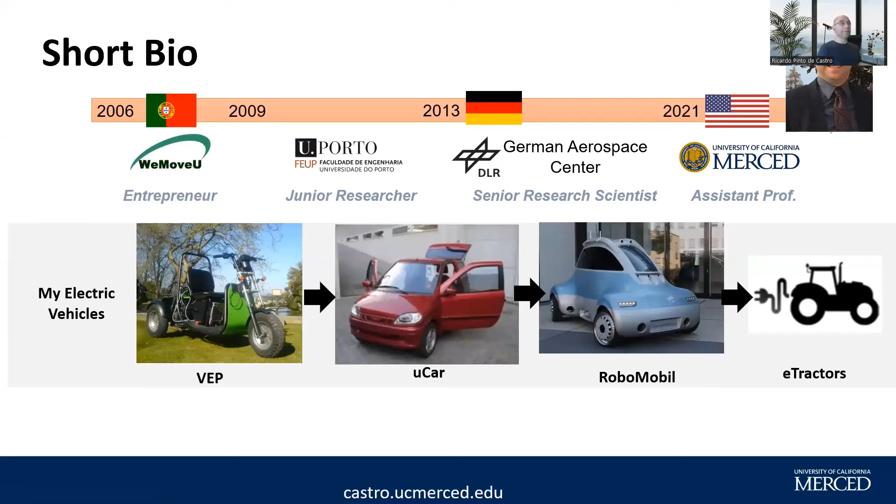When I arrived, I realized that the campus is surrounded by farms. We are in a very rural area. Most of the vehicles that I see in the farms nowadays still run with internal combustion engines. And so there is a huge opportunity and necessity to decarbonize this sector. And the next stage of my career, I would like to dedicate to finding practical ways to bring electric powertrains to the farm.

A bit of background regarding EVs on roads. Very likely, some of you already drive an EV. There are not just passenger cars, but also other types of vehicles becoming electric. Light-duty trucks. You might come to campus using an electric bus, and so there is a lot of traction going on with the electrification of road vehicles. Also, in terms of sales of road vehicles, this year more than 13% of all sales are going to be of EVs. And the forecast for the next years is of tremendous growth.

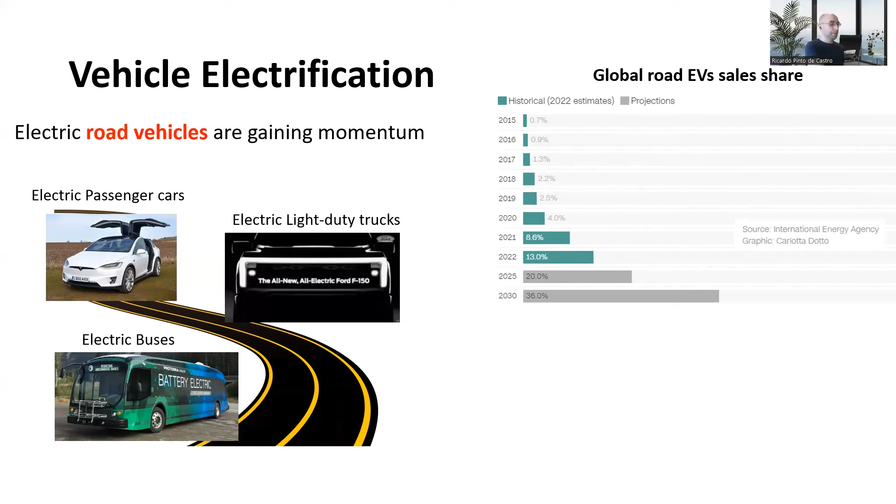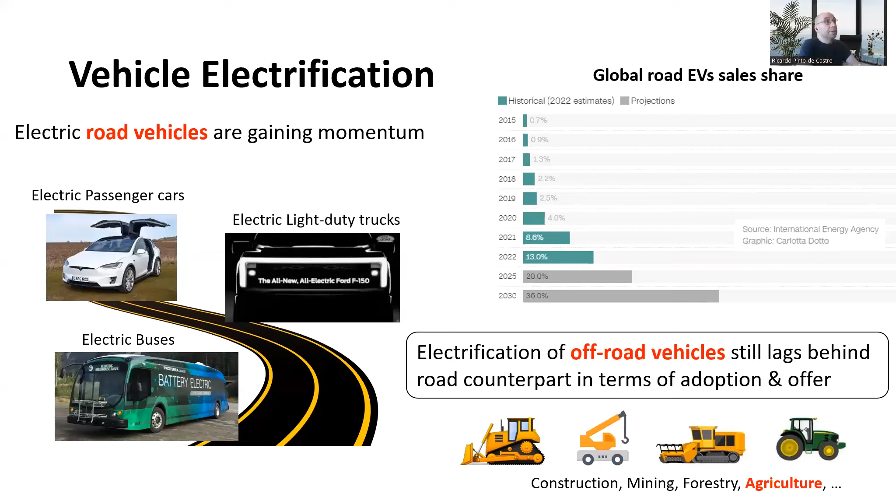But there are other types of vehicles that we need to use, and they don't operate on roads. They operate off-road. Some of the examples you can find in construction sites, in mining, forestry, agriculture, which is the focus of today's presentation. And in comparison with road vehicles, you don't find many off-road EVs. Also, in terms of adoption, we are still lagging way behind what is happening on the road. And so that's the main motivation for today's talk, to look more into this sector, and in particular into the electrification of farm vehicles.

So my presentation is going to be divided into three main parts. At first, I'm going to talk about why it's a good idea to electrify tractors, some of the challenges, some of the opportunities, and I'm also going to present one of the main research questions that I've been looking at in the last months, which is: I want to understand under what conditions an electric tractor can be more affordable than a diesel, especially when you take into account the entire lifetime of the tractor. So not just the purchase price, but also operation and maintenance costs.

And in the second part of the talk, I'm going to say a few words about the methods that we are using to address this question, some of the operational requirements that we need to understand for the tractor, some of the simulation models that we are using to predict the performance of the tractor. And then at the end, I'm going to share some of the techno-economic results, some discussion, and outlook for future work.

So tractors are used in farms, and almost 50% of all the land that we have here in the US is dedicated to agriculture. So it's a big sector. And tractors are used in farms to provide power to a wide range of agricultural tasks and operations. Usually you attach an implement to the rear of the tractor, and depending on the implement, you can be supporting different types of tasks, ranging from tillage, weeding, fertilizer application, harvesting, and also shuttling of crops from one side to the other.

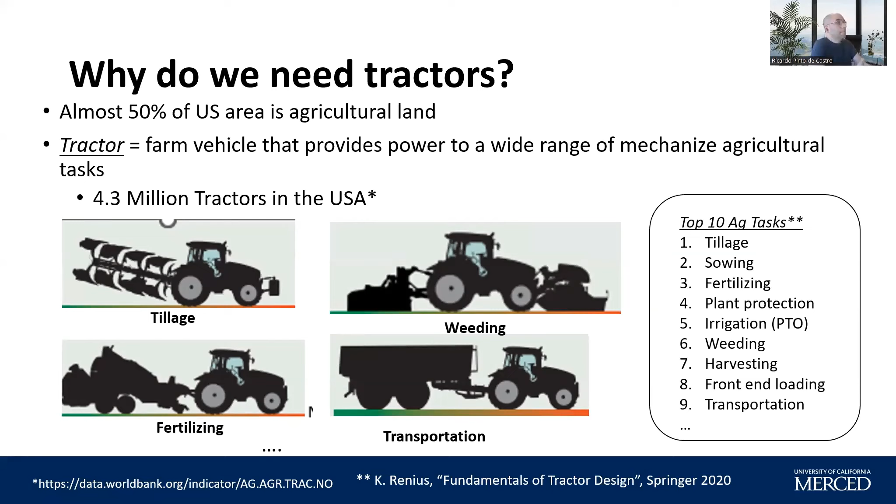And there are plenty of tractors here in the US. More than 4 million tractors exist here in the US, and most of them still run on diesel. And so they generate emissions, they have all kinds of issues, as we will see in the next slides. And so it is a necessity for us to start thinking about electrifying these kinds of vehicles.

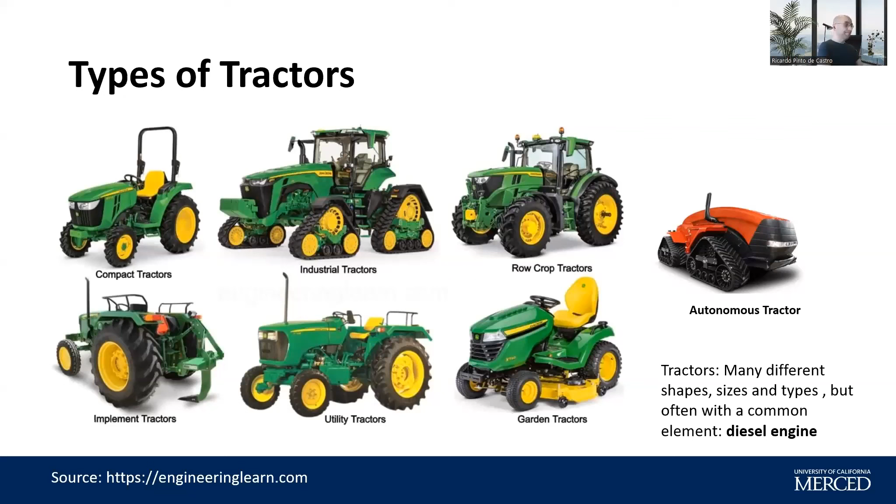Tractors come in different shapes, different forms. You can find them in gardens. You can also acquire compact or utility tractors, which are a bit smaller and are usually very effective, for instance, for orchards. You can also go a bit bigger for row crops, and also industrial tractors for big industrial farms. You have different types of locomotion, wheels, tracks. Lately, you also have autonomous tractors being developed. And so there is a wide variety of options, but most of them still share a common feature, which is a diesel engine.

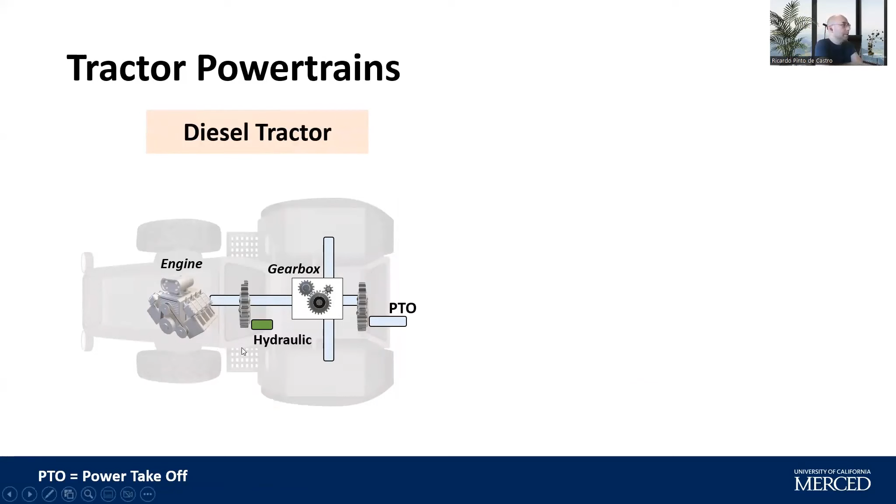And in this slide, you can see a simplified representation of the powertrain of a conventional tractor with a diesel engine. Coupled with the engine, you have the mechanical transmission, a gearbox that provides power to the wheels. You also have an additional interface to transfer power and energy to the implement through the PTO, the power takeoff. And you very likely also have a hydraulic system inside the powertrain. And what I would like to discuss today with you is: why not replace the diesel engine in the tractor with an electric motor and supply energy to the tractor using, for instance, a battery instead of burning fuel.

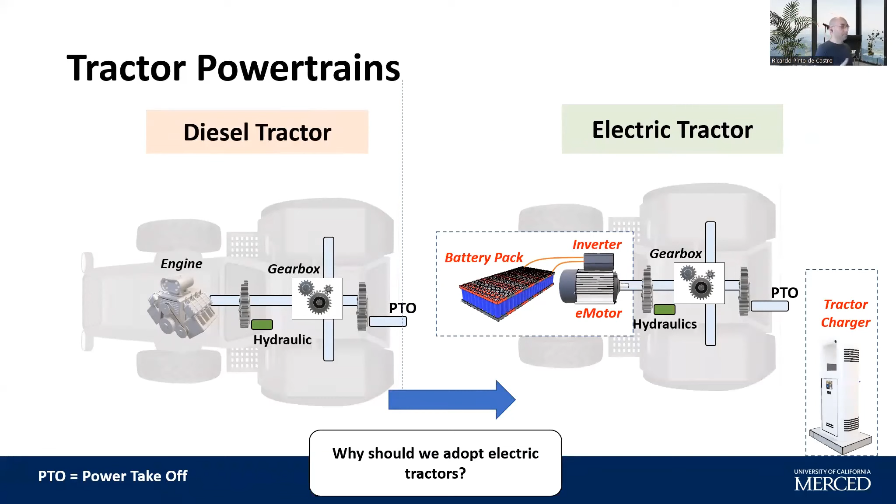And it's not just acquiring the tractor, you also need to think about how you're going to charge. We're also going to look into the charging problem. And so now I'd like to address the question, why should we electrify the tractor?

One reason is related with air pollution. Diesel and internal combustion engines generate CO2 gases that affect global warming. They generate particulate matter, nitrogen oxide, NOx. In particular, this last gas is something that can cause respiratory illnesses among humans, and it's a big concern.

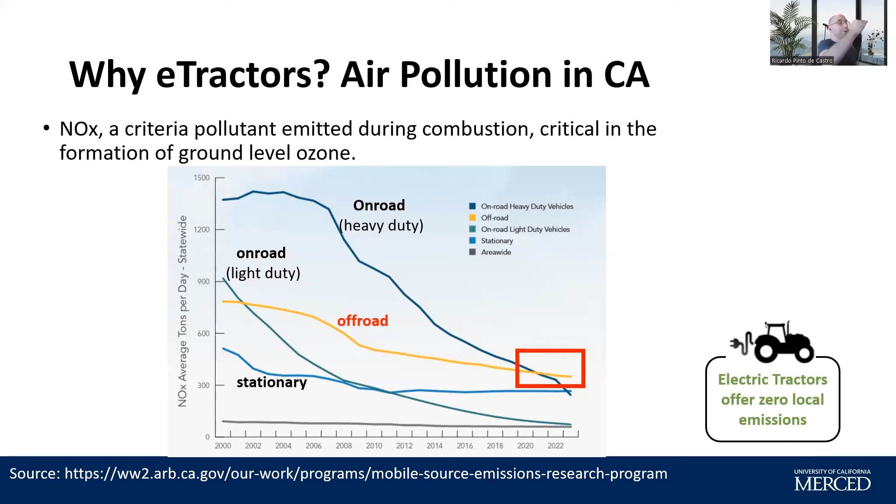And the positive trend that you see here in this plot is that these emissions are going down. But if you look closely into this plot, you can see that the pace at which the reduction of off-road emissions is happening is a bit slower than the reduction in other sectors. In fact, off-road vehicles are on track to overtake road vehicles as the main source of NOx, which is going to be a big problem. And so electric tractors can help us bring these emissions down.

Then another dimension is related with policy and regulations. Perhaps you heard a few weeks ago, California announced the ban on the sale of cars with internal combustion engines by 2035. There is also an executive order from our governor that expresses the desire to transition to 100% zero emission off-road vehicles also by 2035.

But there is a catch here, which is for off-road, this is not yet mandatory. It's only where feasible, because it's a bit more challenging to electrify these vehicles. In any case, electric tractors are and will be compliant with some of these upcoming regulations that we start to see here in California.

Energy efficiency. Diesel tractors are not very efficient. In fact, most of the energy that you put into the engine is lost into heat, and a modern diesel tractor does not offer peak energy efficiencies higher than 40%. So most of the energy you put there is lost.

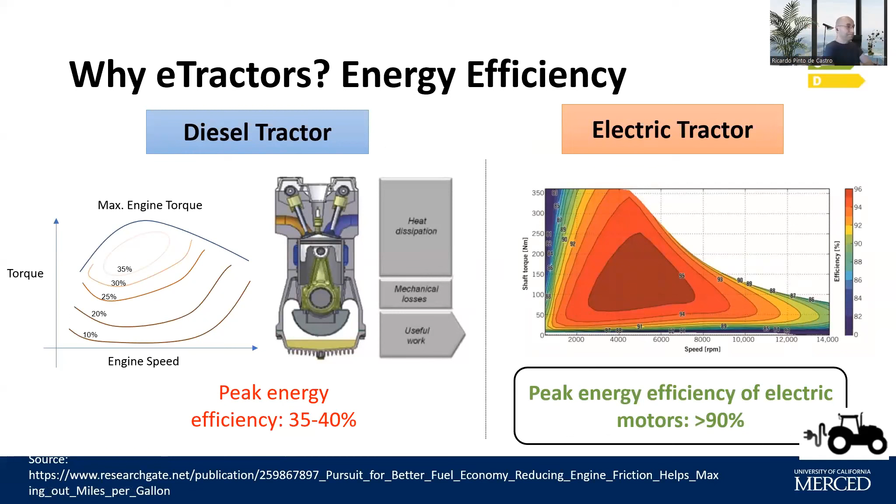This contrasts with the high energy efficiency that you can obtain from an electric motor and an electric tractor. Modern electric motors can offer peak energy efficiency higher than 90%. So it's completely the opposite. Most of the energy you put in the motor is used to develop useful work. And that's a big advantage of electric tractors.

Additionally, we should also look into the noise. And to understand that, it's convenient to look into this noise scale using decibels, dBs. We start at 0 dBs, which is the softest sound that we can hear, and this goes all the way to 120 dBs, which is something that you might be exposed to if you go to a rock concert. And a diesel tractor generates noise in the range of 95 to 105 dBs, which is pretty significant.

And according to the CDC, if you are exposed to noises that are higher than 100 dBs for less than 5 minutes, you might develop risk of hearing loss. And so you can imagine farmers, workers that are in the farm, they are exposed to this kind of noise all day. And that's a problem.

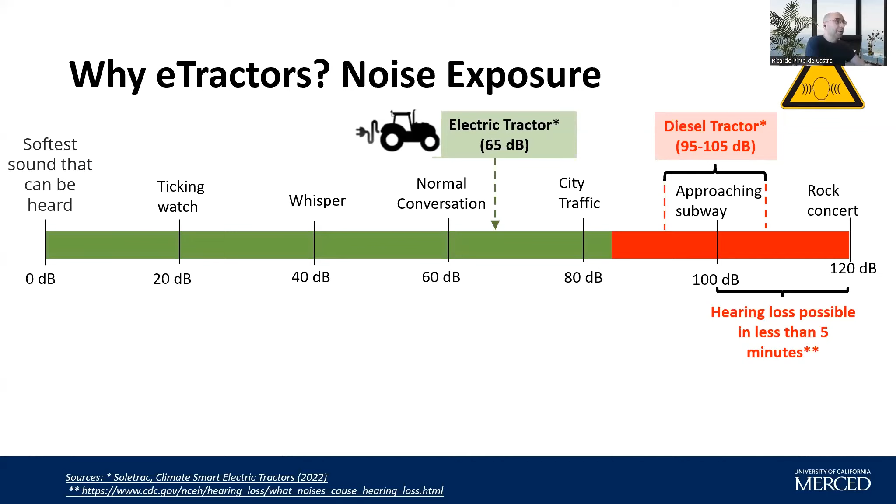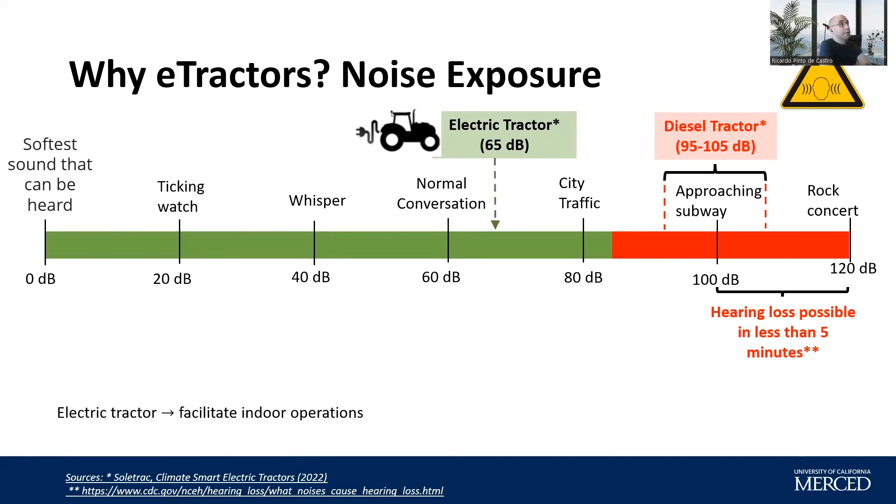On the other hand, electric tractors are quieter. In fact, they generate a noise that is slightly higher than my voice pitch right now. And so that's much more friendly when you think about interacting and working around the tractor all day. And because of their low noise and low emissions, you can also use electric tractors in indoor operations, which is much more challenging when you have a diesel tractor.

Then going into maintenance and repairs, as you use the tractor, there are components that are going to break down, they are going to wear out. And so you need to cover the costs for this maintenance. In this plot, you can see the average repair costs of a diesel tractor as a function of the number of working hours. As expected, as you use the tractor more and more, the maintenance costs are going up.

And in fact, if you are a heavy user of a tractor, it's not uncommon to see 50, 60, 70% of the purchase price used for maintenance and repairs, especially if you take into account the entire lifetime of the tractor. Now, electric powertrains usually have fewer moving parts, especially the engine, and that contributes to a reduction in the maintenance costs, especially of the mechanical powertrain.

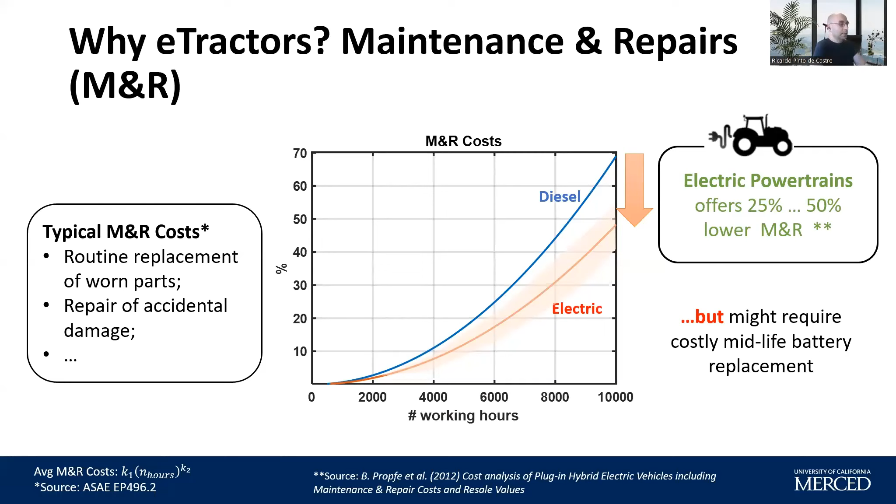And there are several studies that indicate that the electric powertrains can offer lower maintenance costs, up to 50% in some cases of cost reduction in M&R. But there is a catch, which is at some point with an electric powertrain, you might need to replace the battery. And that offsets some of the gains that you have in the reduction of mechanical maintenance.

Charging infrastructure is also another concern when it comes to electric tractors. The good news is a tractor normally doesn't travel far away from home. So that means you're not too far away from a charger most of the times. But the issue is you might need a significant amount of power to recharge the battery.

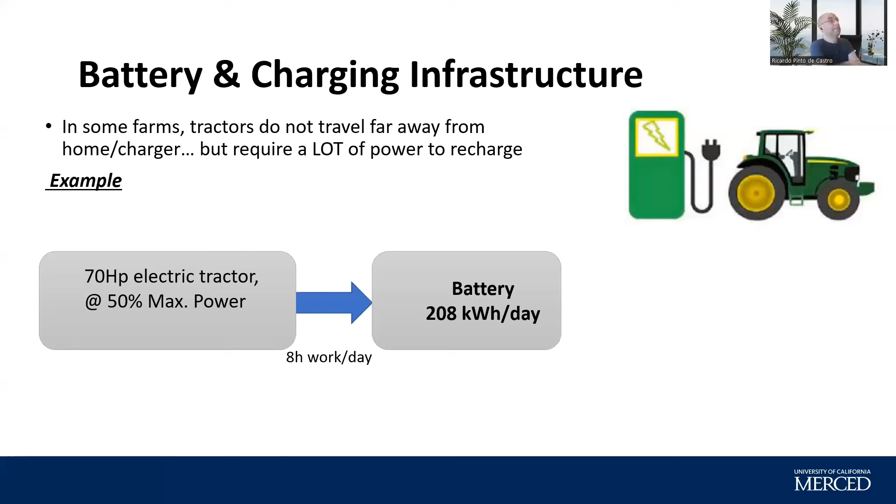And to have a better understanding of this challenge, let's assume that you own a 70 horsepower electric tractor that operates with 50% of the maximum power over 8 hours per day per charge. And under these conditions, you will need a battery that provides at least 200 kilowatt hour of energy per day. And this is 2 to 3 times bigger than a battery that you have in a Tesla Model 3.

And when you think about charging this battery overnight, you might need to acquire a charger with a peak power of 17 kilowatt, which is again pretty significant. This power level is 2 to 3 times larger than the maximum power you extract at your home. And so when you start thinking about farms that are located in remote areas, these high levels of charging power might be a barrier for the widespread use of this technology.

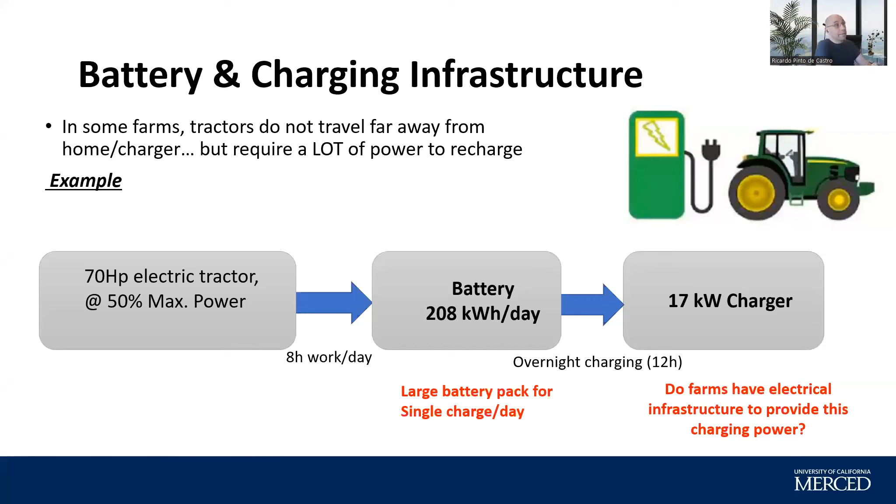They have low noise. And in terms of maintenance and repairs, especially the mechanical maintenance, they can reduce costs on that front. Challenges are related with the charging infrastructure, so you might need to upgrade the electrical installation. Also, the energy storage, if you go with the batteries, they are bulky for this high power and heavy duty use, and there are also acquisition costs because the electric tractor is a new technology. Some of the components are a bit more expensive, like the battery, and that will require higher purchase costs, which might not be so attractive for a farm.

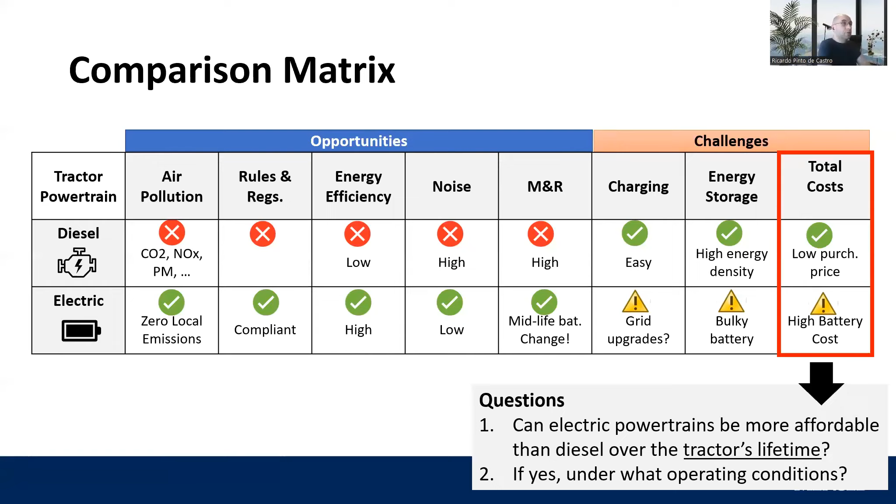And so for the next minutes, I would like to spend a bit more time talking about this total costs issue, and to understand under what conditions an electric tractor can be more affordable than a diesel when you consider the overall costs of ownership of having a tractor. So throughout the entire lifetime, not just during the acquisition, but also during the operation. And so that's the main question I'd like to address in this part of the presentation.

So regarding the methods that we use to address this question, to motivate the methods, imagine that you are a farmer. You have a tractor right now in your farm, and you decide, okay, it's time to replace the tractor. And the question that emerges is, what type of powertrain is more suitable for your farm? Should I buy a new diesel tractor? Should I replace it with an electric? There might be also in the future opportunities to have hybrid powertrains that mix both. And so that's a practical question that is emerging now.

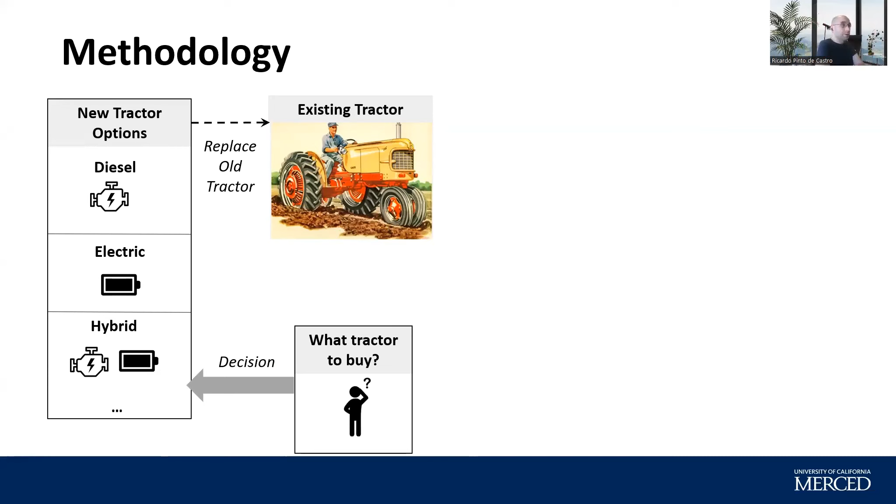And so how can we help the farmer decide about the best type of powertrain for his operation? So to address this, we are designing and building a decision aid tool that can guide and inform the farmer making this decision. And so this decision tool is divided into three main blocks. So in the first, we have a pre-processing block that collects data from the farm, collects data from the tractor, and captures the operational requirements for the new tractor.

In the second part, we have a simulation model that predicts the behavior of the electric powertrain, of the diesel powertrain, and we have better understanding about the expected fuel consumption or energy consumption of the tractor. And then at the end, we have a techno-economic analysis, which produces some performance or evaluation metrics, including total costs of ownership. So not just purchase price of the tractor, but also fuel, energy costs. We also have other metrics for emissions, which might be important, not only for the farmer, but also for governmental agencies to show that we are decreasing these emissions. Okay, so that's the overview of the decision tool.

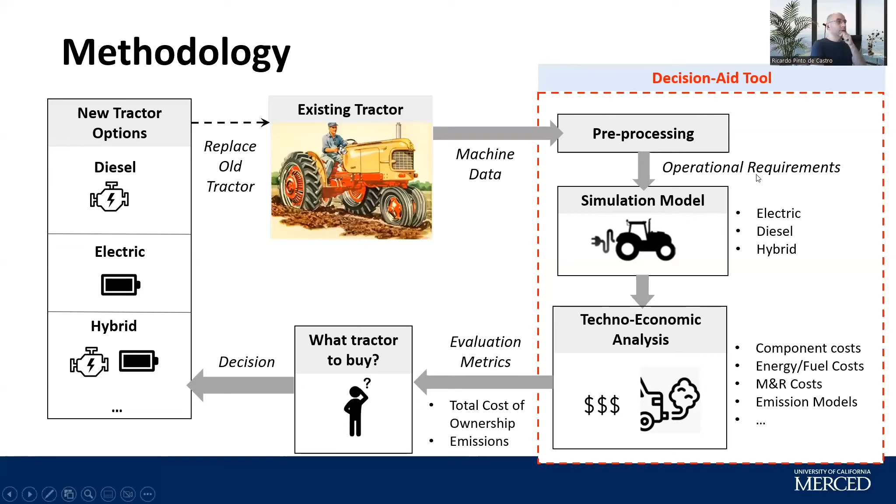Let's now have a closer look into these operational requirements that you need when you are thinking about replacing the tractor. So we need to decide what is the nominal power of the tractor. So in this study that I present here, I assume that the power is equivalent to the power we have right now in the farm.

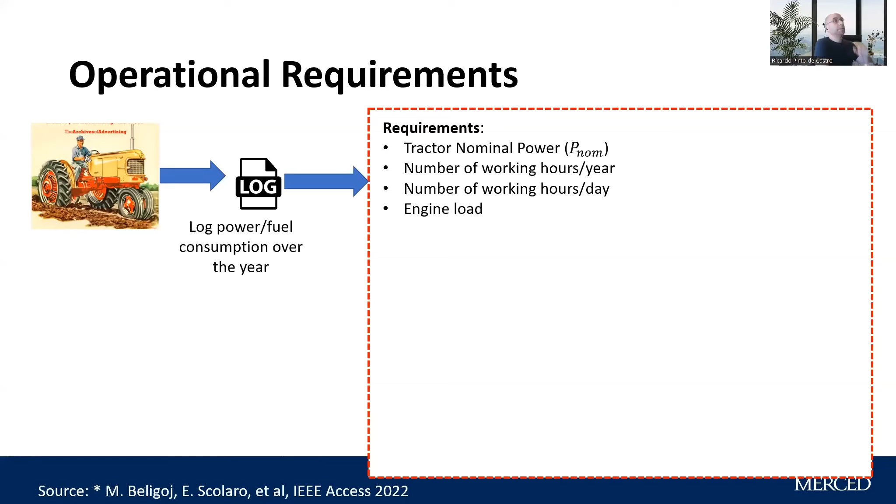We need to understand how many hours you use the tractor per year, how many hours you use the tractor per day. That will play a big influence in the size of the battery. And also very important is what kind of tasks are you doing with the tractor? Are they heavy lifting tasks? Are they light tasks? And we can capture these kind of requirements using engine load profiles.

And to better understand this, I have here this plot. In the horizontal axis, you have the engine load normalized with respect to the nominal power. So if you have one, it corresponds to extracting the full power that the tractor is producing. 0.5 means you are extracting half of the maximum power, and so on and so forth. In the vertical axis, you can see the cumulative distribution of the engine load.

And you can read this plot as follows. Imagine that you are looking into this blue curve, which corresponds to the engine load when you have a tractor in an orchard. And you see that 60% of the time, the tractor is using an engine load that is 20% or lower. So most of the time, the tractor is operating with light loads. And when you look into other curves, for instance, a row crop, you see that the tractor starts to be used more with medium and heavy loads.

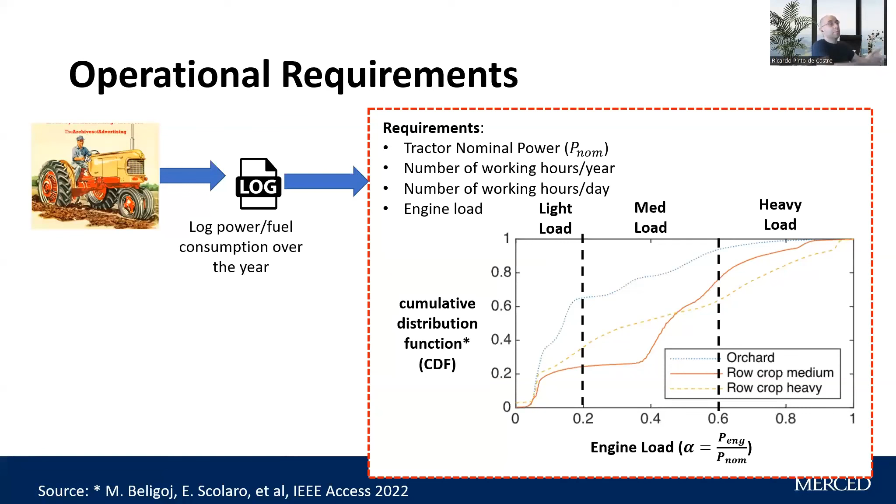And so if we have access to this kind of statistical characterization of the engine load, we can have a better understanding about the power and energy needs that the tractor is going to develop while in operation. So based on this data, we can construct operating cycles that we can then inject into a simulation model. We start first with a simulation model for the diesel powertrain.

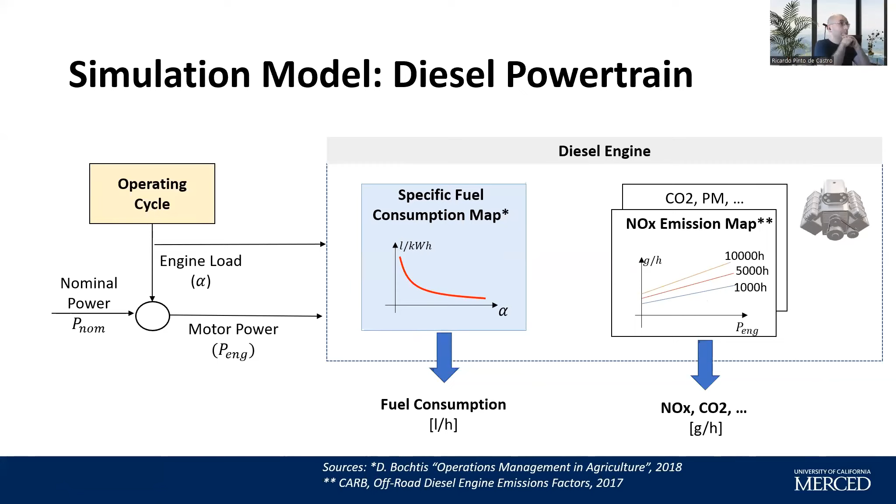So we have a couple of metrics that we need to look into. We need to look into the fuel consumption or fuel rate of the engine, and we are using lookup tables to obtain this estimation. And we also need to predict the emissions of CO2, NOx, PM. For that, we are using recent models from CARB, which has been studying the emissions of off-road vehicles for a long time, and they have very practical models that we can include in our simulation framework.

Then we do the same for our electrical powertrain. So we need to look into the power that is being requested to the motor. We take into account the losses that we have in the powertrain, which for the electric version are not that significant. And then we can estimate the amount of energy that the battery is deploying while in the field.

Also very important is a degradation model for the battery, because as you go through the charge-discharge cycles, the amount of energy that you're able to extract from the battery decreases over time, and at some point, you need to replace the battery. So in our simulation framework, we also have a simplified model that allows us to understand the time when we need to change the battery.

And we also have another component that looks into the charging power, which is another important aspect of the operating costs of the electric powertrain. So that was the simulation model. Now let's look into the total cost of ownership. There are four main categories that we are using. We're looking into the vehicle costs, or the purchase price of the vehicle, the energy costs, infrastructure, and there are other costs that also need to be taken into account.

Regarding the vehicle costs, we need to look into the cost to assemble and build the chassis, the mechanical transmission, diesel motor, the electric motor, the battery pack. To account for these component costs, we are using some normalized cost metrics that we found in literature. Unfortunately, I don't have time here to go into too much detail, but if you have questions, we can address them in the Q&A. We also need to take into account the taxes, the finance, in case you need to ask for a loan.

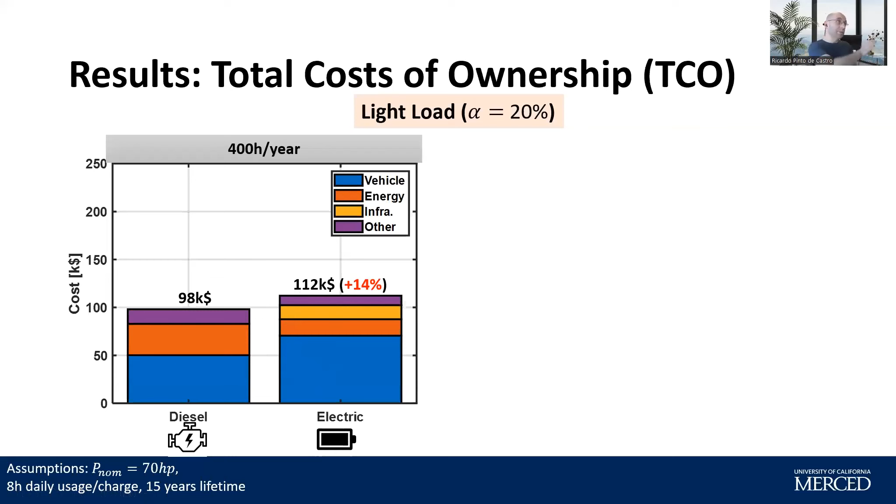And when you dig deeper into the cost breakdown, you see that in blue we have the purchase price of the vehicle, and so you are paying more upfront for your electric vehicle. You also have the extra costs with the charging infrastructure, and that's the main reason why the electric powertrain is not that attractive for this particular operating scenario.

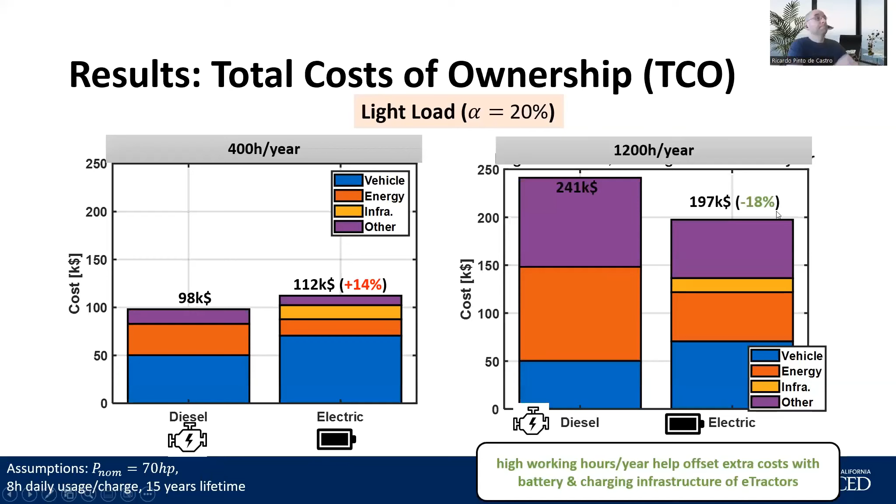And when you look into the electric powertrain, you see that the purchase price is still high, but the energy costs are significantly lower than the diesel. And because of that, we are able to reduce the total cost of ownership with the electric powertrain by 18%. And so that's an area where the electric powertrain is very attractive. And we continue doing this analysis to try to understand the different operating scenarios where electric powertrains pay off.

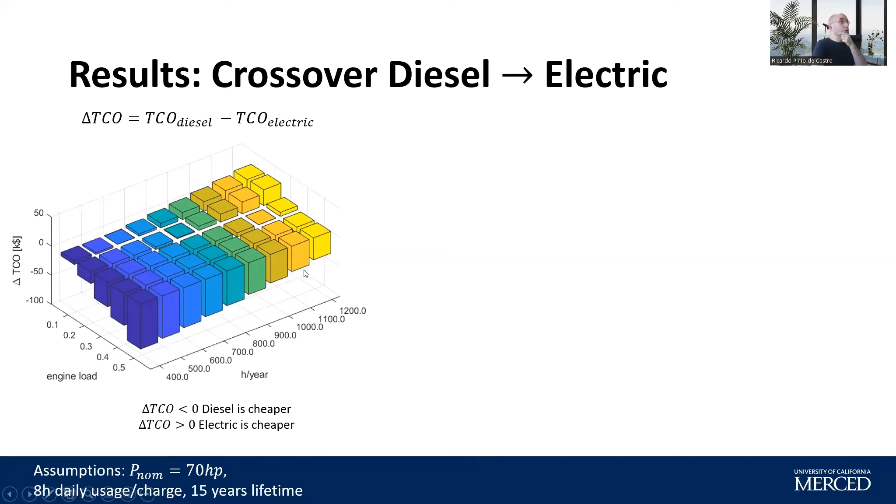The other remark that is worth mentioning is that as you increase the number of hours per year that you employ the tractor, then you have the higher fuel costs. And then the electric powertrain becomes more attractive and more competitive from an economic perspective.

And so what you can see is that the electric tractor as it is today is not yet able to cover and to reach, from an economic perspective, the average operating conditions of a tractor here in the state. How can we improve the economic competitiveness of an electric tractor?

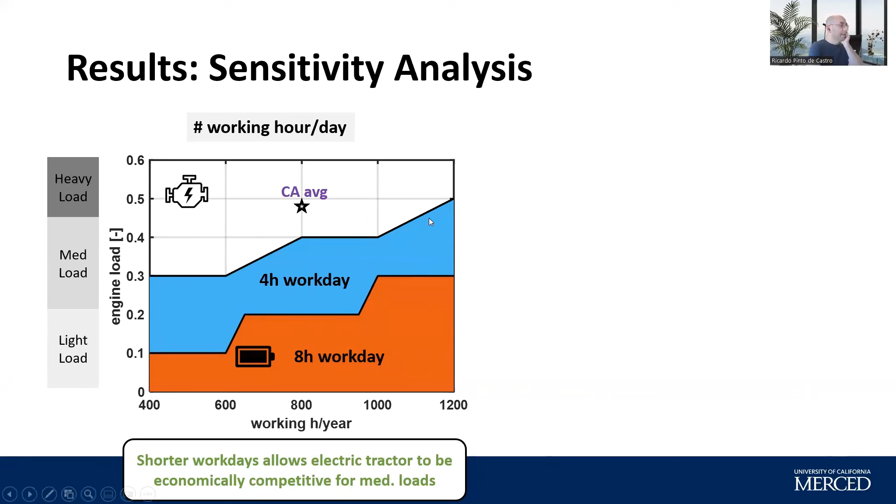One way to look into this is by reducing the working hours that you have per day. So for instance, instead of working 8 hours, if you just work 4, then you don't need to carry such a large battery with you. And so that means we can increase the operating area under which electric pays off, as it is highlighted here in this blue area. Also, another exercise that we can do is, it's expected that in the future, the costs of the batteries are coming down.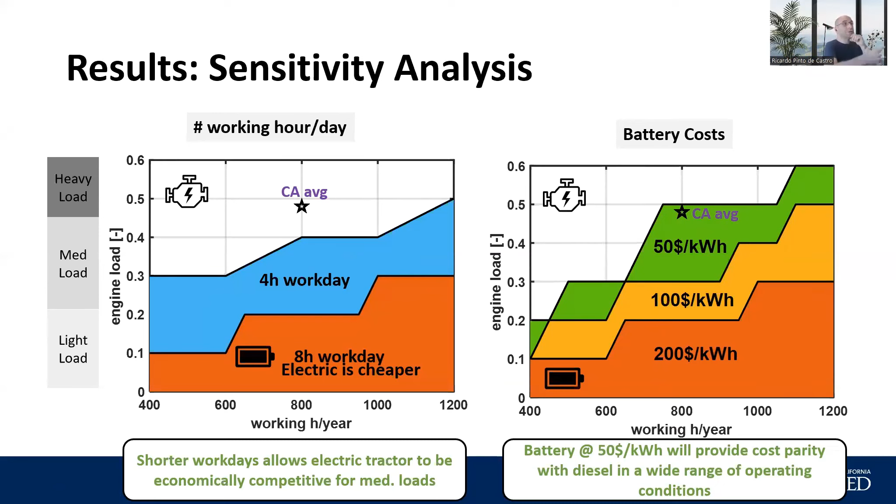And so when we reach, for instance, $100 or $50 per kilowatt hour, we expect that the operating conditions under which electric is more affordable are going to increase and expand. And when we reach these $50 per kilowatt hour, we will be able to cover the average operating conditions of a tractor in California. So we either work less with the tractor or we wait until the batteries become affordable in order to have conditions under which electric tractors are more affordable.

Now, there's also another dimension that we can't forget, which is related with the battery weight. And this plot shows what happens to the battery weight as you increase the engine load and as you increase the number of working hours. The vertical axis represents the percentage of the battery mass with respect to the tractor. And so if you have heavier loads, you can start to have very heavy batteries reaching 50, 60% of the overall mass of the tractor, which is pretty significant. That puts a lot of pressure on the soil, might damage the soil structure, and might also have a negative impact on the crop yield.

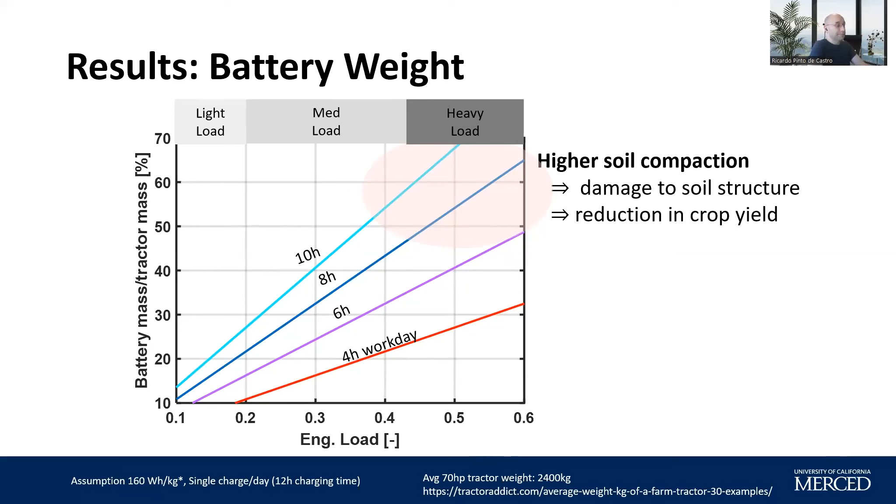And there are a few alternatives that we can explore to address this issue. One possibility is to use, for instance, a wired electric tractor, a concept that was proposed a few years ago by John Deere. Essentially, you bring a cable with you. You can employ a very small battery inside the tractor, and you just rely on the power that the cable provides to you. Not very practical, but could be a first entry point of electric powertrains for big machines.

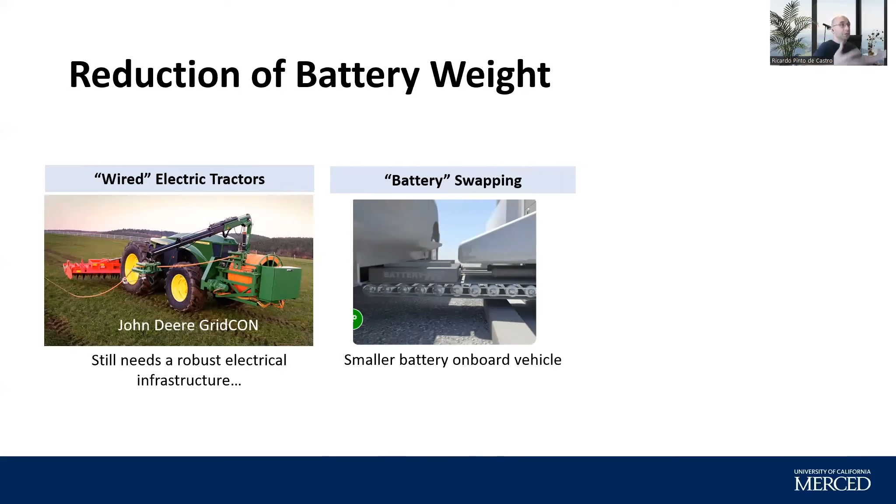Battery swapping is also another possibility. So imagine that you have 2 batteries, one that you use in the morning, another that you use in the afternoon, and at noon you swap the battery. So you don't need to carry such a large battery with you all the time.

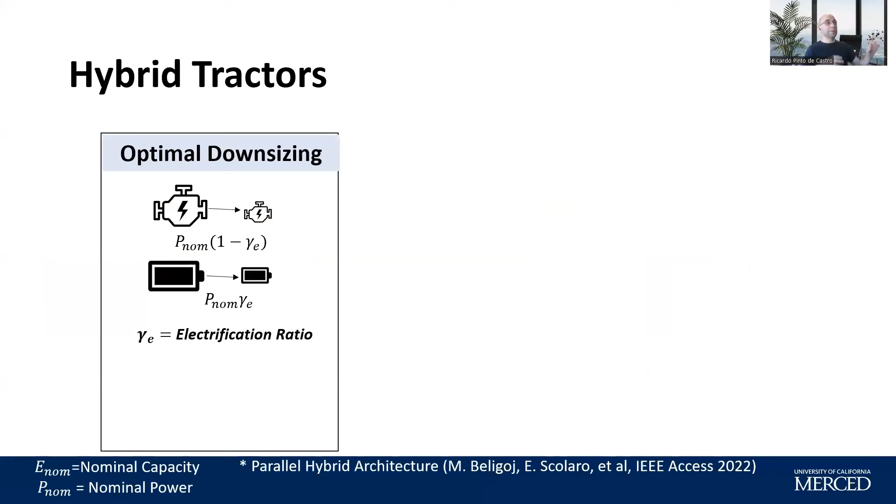And another possibility that I would like to briefly touch on today is related with the hybridization of the powertrain. So combining a diesel engine with an electric motor and an electric powertrain in order to exploit the best features that you have from each of these 2 worlds. So high energy density with diesel, high energy efficiency, and low emissions from the electric part. So when you think about hybridization, the first question that we need to look into is how big should the diesel engine be? How big should your battery be?

And so to address this, we formulated a simple optimization problem that tries to find the sizing of the motors, taking into account the minimum total cost of ownership. We're also considering a hybrid powertrain that has a parallel architecture where you incorporate the motor in the same axle as the diesel engine, and that facilitates the combination of both torques that these two machines produce.

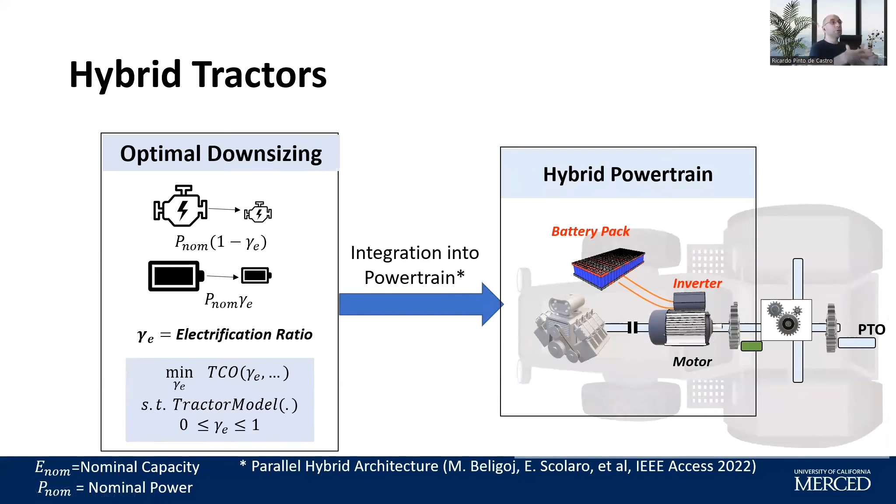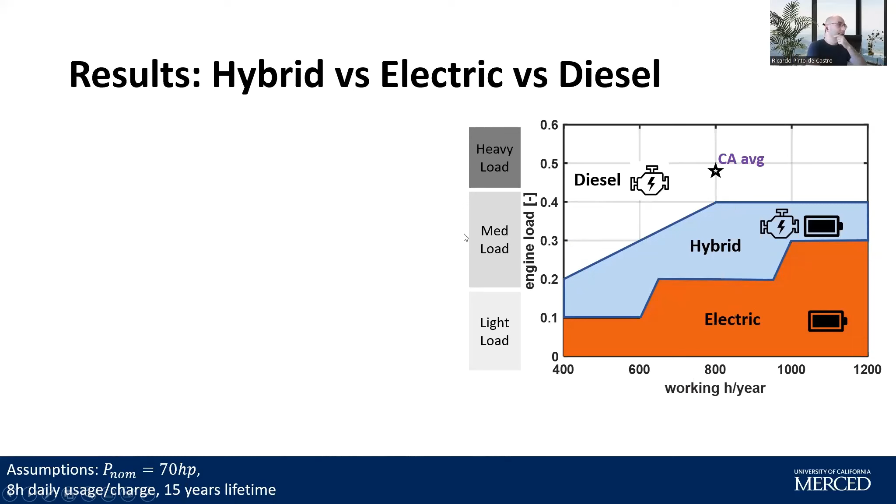And so let's look into the areas where the hybrid powertrain is competitive from an economic perspective. The sweet spot for the hybrid powertrain corresponds to the medium loads, so something between 20 and 40%. And that's an area where hybrid is even cheaper than electric and diesel. And so when you dig deep into the economics, in this plot here, we have the total cost of ownership when the load of the engine is 30%.

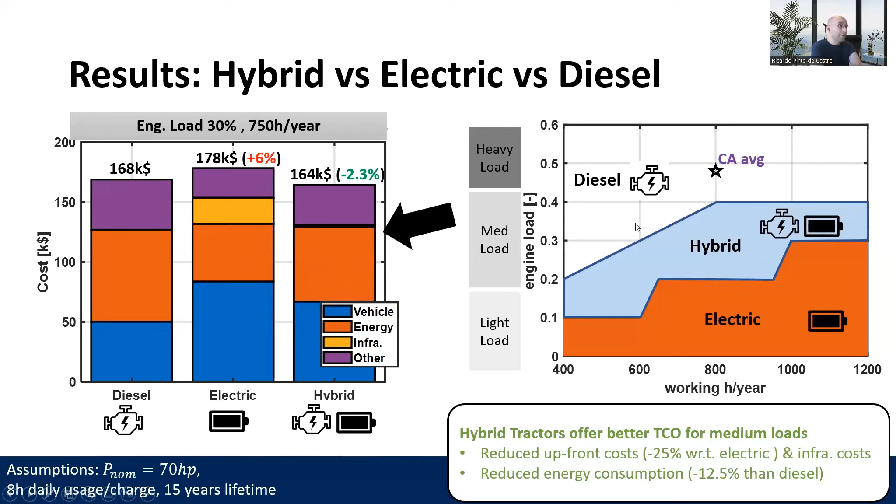We see that the hybrid powertrain reduces the overall costs by 2% when compared with diesel. It reduces the fuel costs by around 12%. And it also offers lower upfront costs for the farmer. So the cost of a hybrid tractor might be smaller than the electric. And so these are some of the reasons or areas where hybrid is attractive.

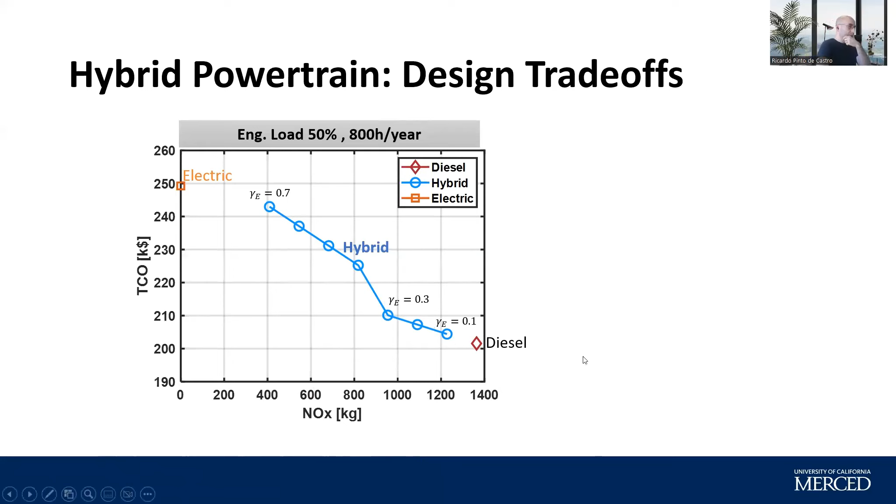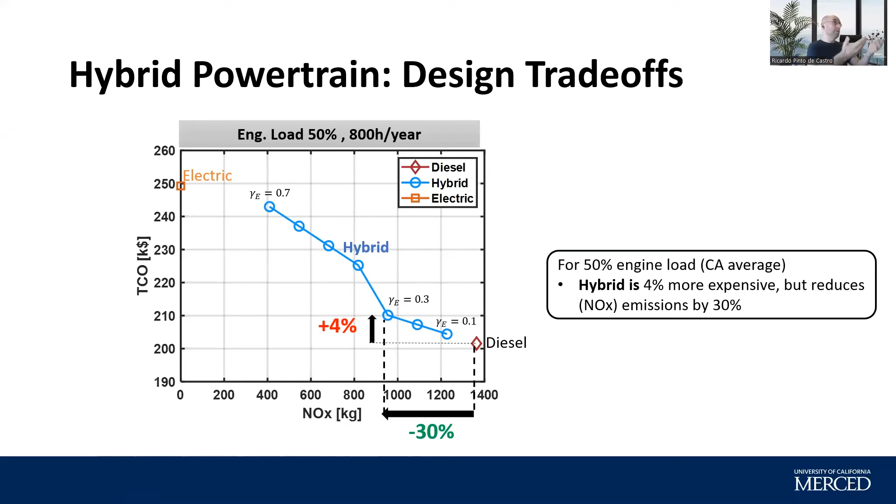So as you increase the size of the electric powertrain, you are able to decrease the emissions, but you need to pay more. And a potential good balance here, for this particular operating point, could be a hybrid or an electrification ratio of 30%, where you decrease the emissions by 30% at the expense of a 4% increase in the overall costs of the tractor, which could be a good trade-off as you go to larger machines.

And this brings me to the conclusions of today's talk. So I talked about the opportunities that you have with electric tractors to reduce air pollution, improve energy efficiency, reduce noise. Our study indicates that electric tractors are already cost competitive as long as you operate them with light loads and as long as you take into account the entire cost of ownership of the tractor. We also saw that as the battery costs come down, you might find many operating conditions where you have cost parity between diesel and electric.

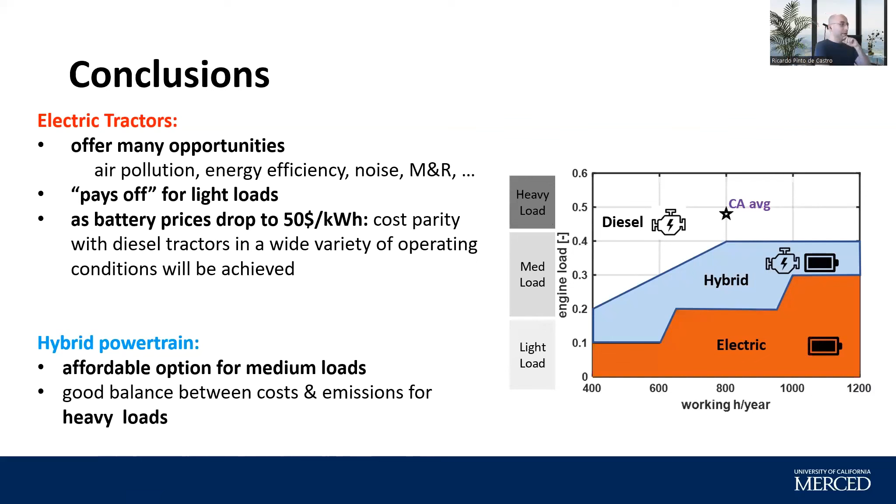We also looked into the hybrid powertrain where you combine both electric and diesel. And this could be an attractive option for medium loads. And it can also give you a good trade-off between costs and emissions as you go to heavier loads. For the future, I'd like to extend this decision tool and incorporate multiple vehicles. I would also like to add more powertrains, not just electric and hybrid, but also fuel cells. And if you are going to buy an electric tractor, perhaps you're also going to make an investment in renewable energies. So I'd like to bring that dimension also to the decision tool.

I hope I will have the chance to transfer this decision tool and to provide technical assistance to the many farmers that we have here in Central Valley. And I also hope that this can be used to increase the readiness level of farms to transition and support electric tractors.